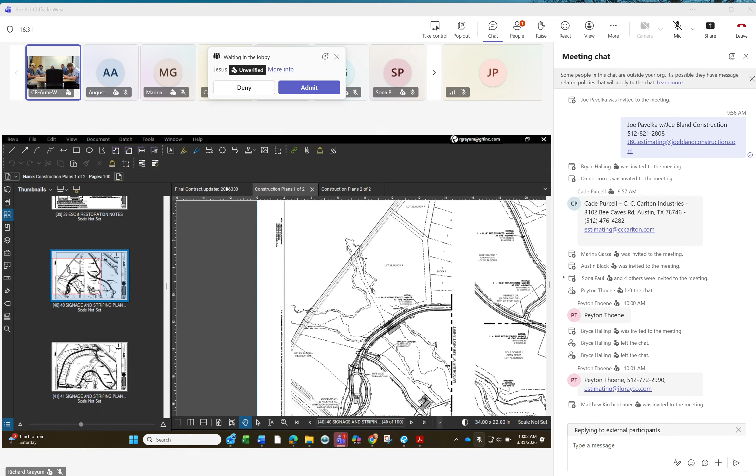Yes, we will vet everybody accordingly. Before this, I had never even worked with Waterline. Who has worked for in the past? Most of my experience has been with Geotech, Liberty. I thought I was missing one. Cash, I've worked some with Cash. Longer time ago, CC Carlton most recently. Some engineering, I haven't worked with engineering. A little bit with DNT a long time ago. Chasco, I worked with, so it's been a bit. Yes, a lot of this. I used to do with Randall Jones, and we dealt with a lot of different array of contractors. Yeah, so Cash, DNT, DC, Austin Engineering, Liberty Civil. Yeah, a little bit everybody. Everybody.

Okay, I think everybody's in the meeting now. A lot of people in the meeting, so we'll go ahead and get started. Why aren't I in that meeting?

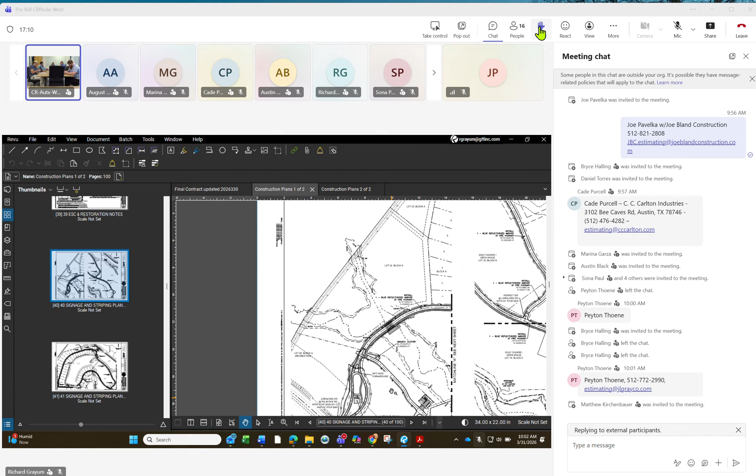30 days, here, okay. I was trying to share my screen here. Someone raised their hand, I don't know. Oh yeah, I'll go back. Oh, it's a store, yeah please. Can everybody hear me on the phone? Oh.

Yes, absolutely. This is a combination of the Cliffside West subdivision construction plans by GFT and the raw water transmission main by Langan Engineering, both happening in the same physical space. So we thought it'd be better to bring those two projects together and hopefully have one contractor do both projects. So that was the reasoning behind that. Sorry if we're scaring and shocking some of you guys, but that was the intent.

Matthew Hamilton is here with the owner's rep. Matthew, do you want to comment on it? I mean, I think Richard really kind of said what we're looking for.

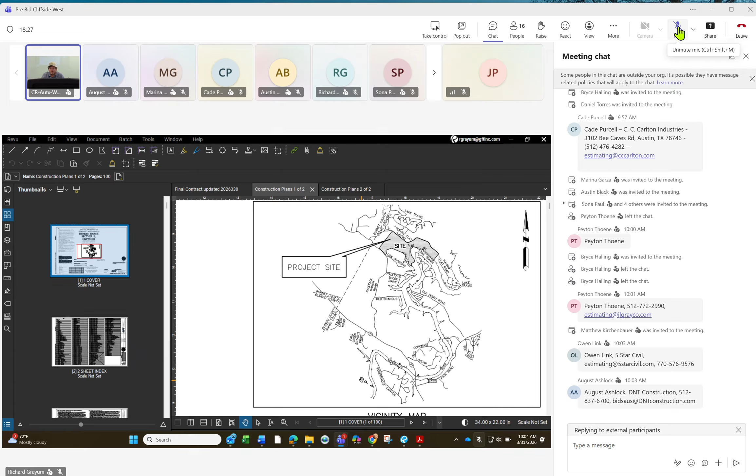I know this is a bit of a unique situation. I thank y'all for being flexible, but yeah, the idea is that we can build out the subdivision, which is Cliffside, at the same time as segment 0 of our raw water line. They're very close to each other, and we're hoping to get some economy of scale by having these two projects together.

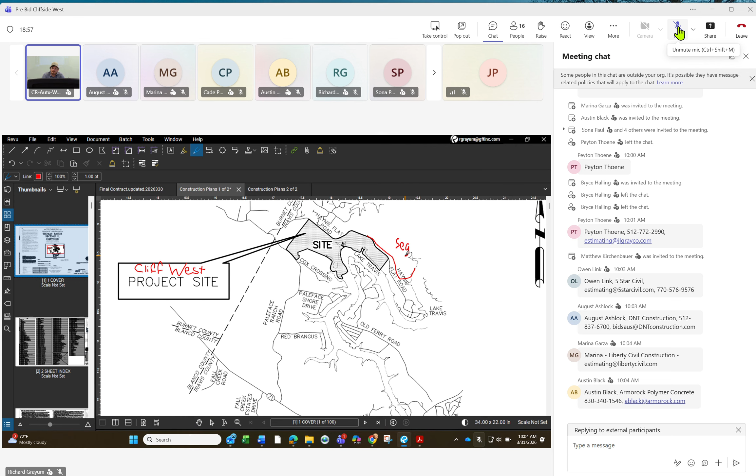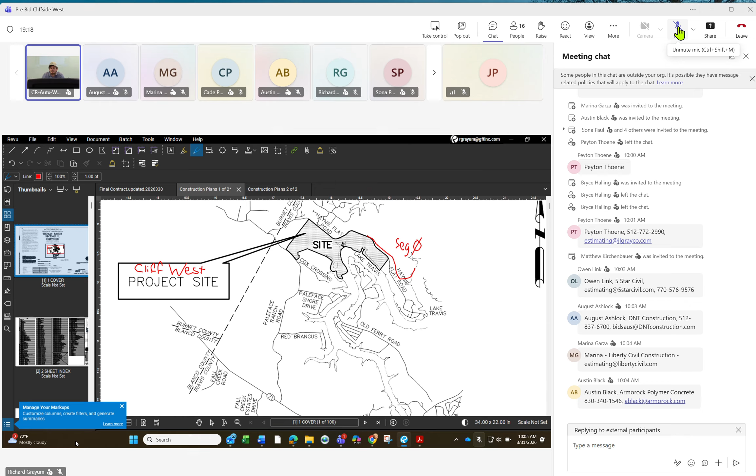So you'll notice as we send out the bid packages that each project is an alternate to the other. We'll be looking at both bids separately, but in a way, we should be getting the same numbers or close to it from both separate engineers' bids, if that makes sense. I can appreciate this is a really unique and potentially confusing situation, so feel free to give me a call to kind of clear any of that up if we need to.

Let me just kind of introduce myself. My name is Richard Grayum, I'm with GFT. Marco Lopez is also with GFT. These two gentlemen are with Langan. You guys want to introduce yourselves? Israel Ramirez with Langan. And Genaro Garcia, project engineer with Langan.

Alex Arndt with Geotech, SWPPP. Riley Hilton with Liberty Civil Construction. Okay, and then we have a cast of thousands on the teams, so I'm just going to show their names there and everybody can see everybody. Does anybody have anything they want to start off with? Any questions before we get too deep into my spiel?

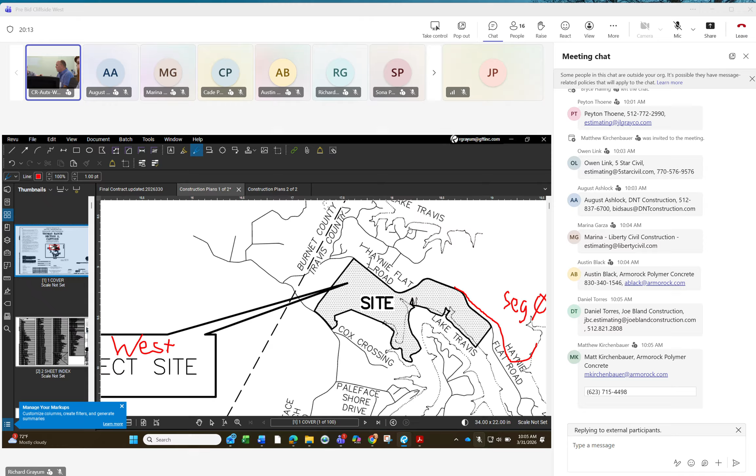I appreciate that. Okay, well, this is the shared pre-construction conference, pre-bid conference for the Cliffside West subdivision plans, and an alternate to include dry utilities for that plan, and an alternate to include the raw water transmission line.

The raw water transmission line comes from Lake Travis and it goes up a private easement, and then it goes through the Haynie Flat Road right of way. Sorry, not the right of way, but an easement just outside the road right of way. But it does cross the road right of way. So we have two crossings of the road right of way, one with segment 0 and one with my project, the Cliffside West project.

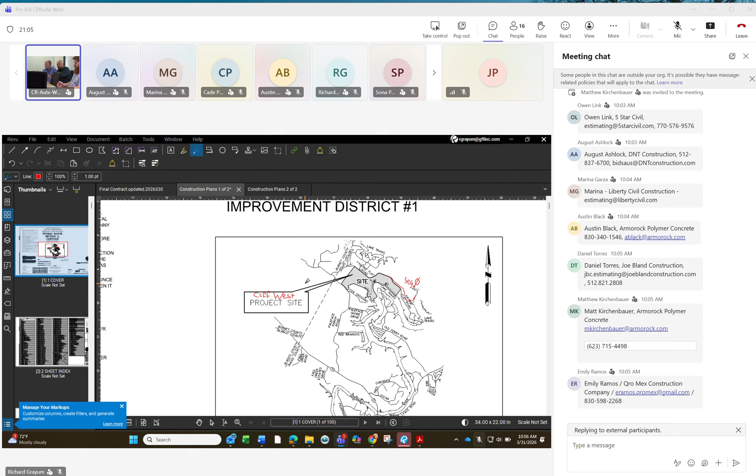In addition to our permits, you'll have to get the right of way permit to cross the street, I believe, across Haynie Flat Road. And Haynie Flat Road is an active road, 45 miles an hour, so please use extreme caution out there. But it is an active road. And they did just - I don't know if you can see my screen, but where this says segment 0, right now there's a construction project to do what's called segment 1, and it kind of continues that to here.

And then there was another project previously to do another water line that goes to here. So we're talking about now in this project doing the red segment. These other lines are already in the ground. In addition to those lines, there's a few site projects out there, the water plant, the wastewater plant, and a few active golf course site plans, in addition to the golf course grading plan.

The golf course grading plan is the Laura Loma golf course. It is a very new golf course, expensive turf, and we're going to have a lot of considerations about how to get you through the project without affecting the golf course. The golf course is active.

What did you say the days were? Every day but Tuesday and Wednesday? Yes. And so if there's any need to cross the golf course path, we're going to probably have to cordon off that portion of the work until we get a good window in summer to go through there. Or is that what you said, summer, June, July?

In July, the golf course will close, and so there could be a window there that we can get a lot of that work done without disturbing golf. And so when he says the golf course, the real big part of your project that's affected by that is just the road, Laura Loma Drive. Let me show you this road here.

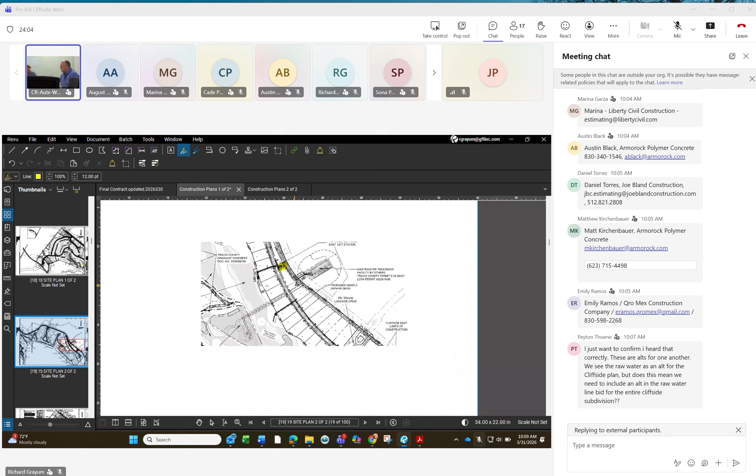And I assume that's where you probably want to dig your test holes. So I'll get somebody's number to coordinate a place for a real limited test hole. If you want to dig any other test holes, other places, just let us know where and what for, and we can consider it. But we're trying to get everybody away from the golf course as much as possible. I don't mind going down here or the other location off the road where that lift station's going, so I think that's where you're most interested and where the test hole is.

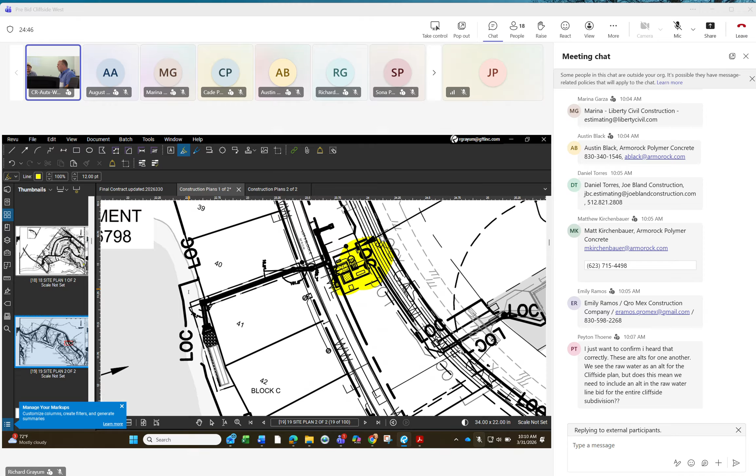And there's some of these level spreaders. I don't think this one's actually in the contract, but there's an example of one where it's real close to golf, but it's outside. It's inside the limits of construction, but golf is right there. So we're trying to keep you guys as tight as possible in there without going over, and the grass is real expensive to replace. But other than that, it's just standard.

I'd say that it's real tight on Hayne Flat with the water, the wastewater, the gas, and the electrical. So what we have out there is a 15-foot utility easement for the gas and electric, and another 15-foot for the water line, and another 15-foot for the wastewater. But the 15-foot water line has a 24-inch raw water line in there.

Proposed and existing, there's a very tight arrangement of how the water lines go together with the wastewater. The wastewater profile has to be 2 feet lower than the water line profile, even though they're all pressure lines. So there's a very specific arrangement within Hayne Flat.

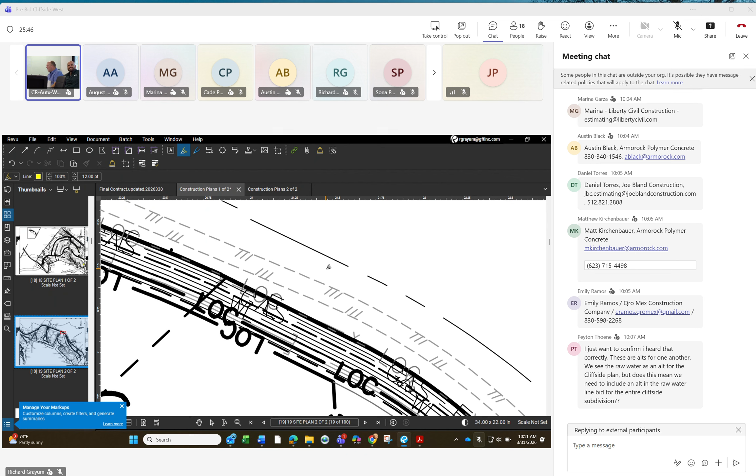Like I said, that first 15 feet already contains the electric, so they made it even tighter to work in. But there is a 20-foot easement on the south side away from Hayne Flat to work in.

So I think we do have the limits of construction to accomplish, putting in the raw water line first, because I think that's the big sucker. And then putting in the wastewater lines, because those are just 8-inch and 4-inch lines through there.

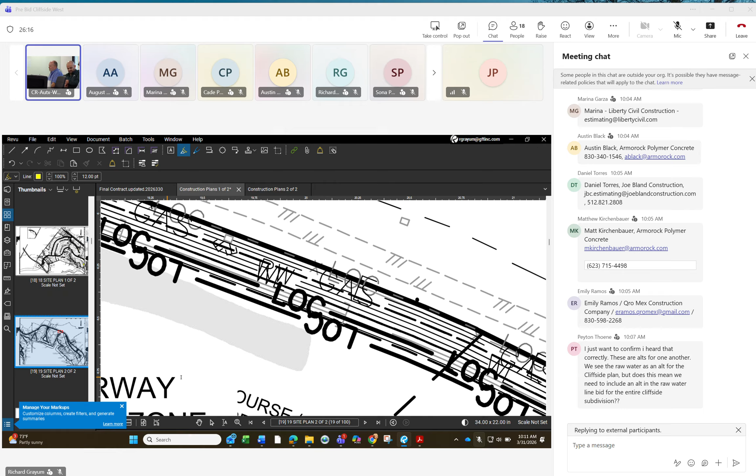I tried to upload the CAD, the Geotech for the streets, and also the Geotech for some of the site plans in the area, because I thought that would be interesting. There's a site plan down here, we had Geotech for what's called the golf house. So I included some of that into your plans, but there's the third lift station.

And I know your contract didn't have 3 lift stations in the bid form yesterday, but it does this morning. So your updated contract is in there, and I'm sure you're going to find some things that I forgot about.

So please put a Q&A, I'll open up the Q&A for you to tell me what I forgot. We will consider it, put it in there if appropriate. Want everybody to bid the same numbers. So if you see something, say something, because somebody's going to say something, I'm going to add it later. So let's just get everything in there and try to bid everything.

We have a tight deadline of April 15th, and we really want to honor that for the client, because they need to sell some of these lots. And in order to sell some of these lots, you can build these lines.

The lift stations are pretty standard lift stations, pretty much RCP kind of lift stations. If you have any questions about them, we can change things about them. We had considered y'all usually do the caisson method, but if that's not the case, we put some wings on them and save you some concrete. We're willing to work with you.

We designed everything, and we can undesign it and redesign it if it saves the client a lot of money. If it saves the client a little bit of money but costs us a lot of money, it's probably not worth it. So just be considerate of the designers.

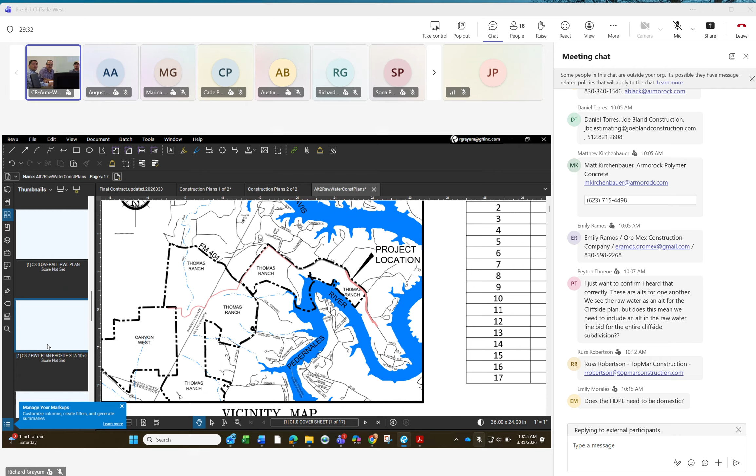We have fully approved plans, so we will be issuing notice to proceed as soon as we can, based on the bid opening. So right now, our bid says April 6th, but we will move it to fall in line with Richard's opening on the 15th. We will send out an addendum.

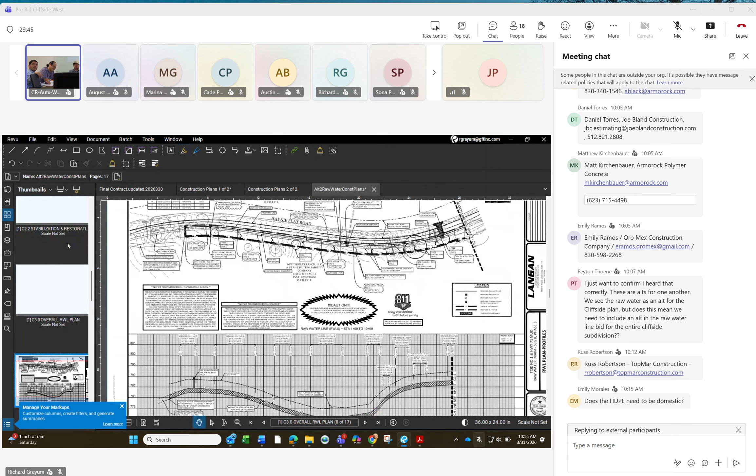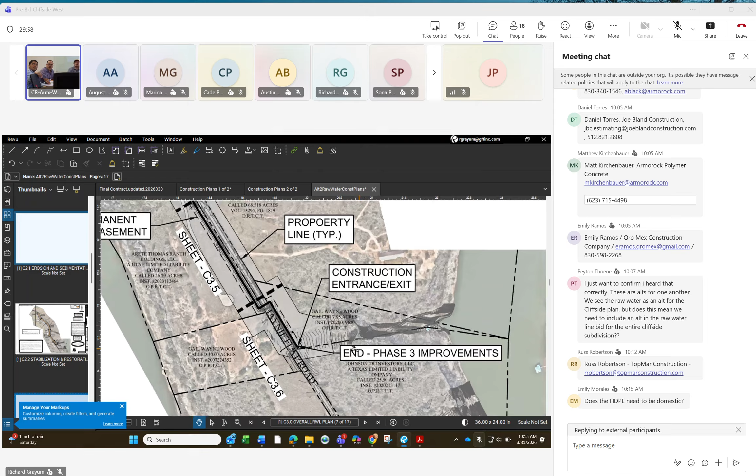Your typical inline furnishing of a 24-inch HDPE main. We need certified welders. We need good, quick production on that main, so Richard's subdivision can come in then after. The goal is to get the same contractor to do both. As mentioned by Matthew, there's a lot of work out here in Spicewood, and we want y'all to bid appropriately for it.

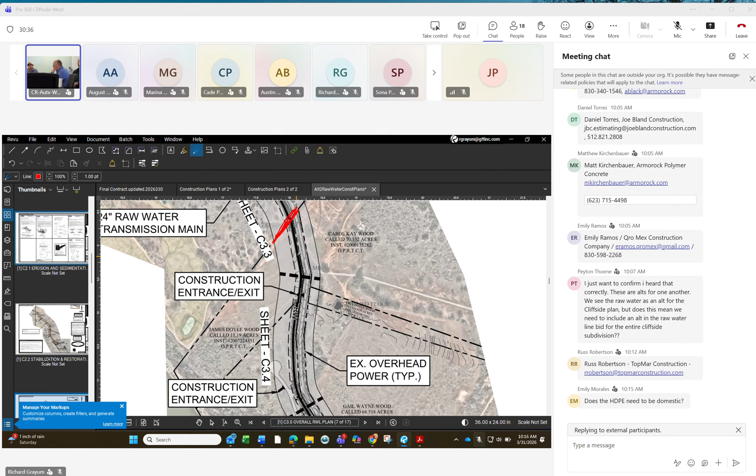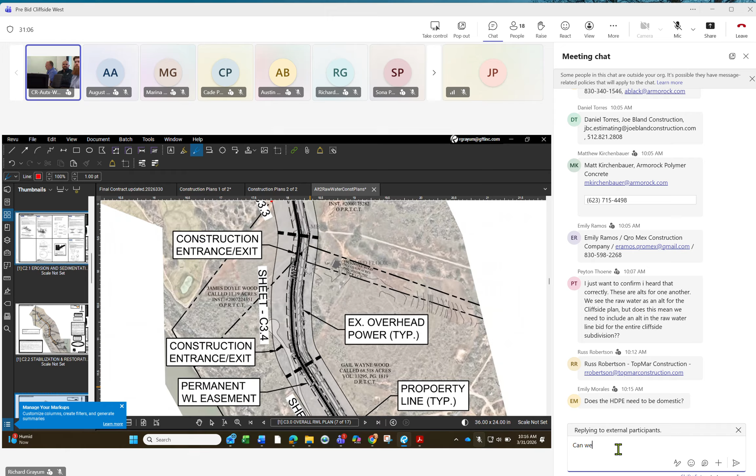You can see the location of my project kind of ends right there and goes for a ways up the street, and their project continues through some easements through here, some of them 15-foot easements. It's very precise line work, and we have the line work in CAD to show exactly where to put it. We're banking on the contractors to get everything exactly in that 15-foot easement, and that's kind of what I think they need to know.

It'll be inspected by Travis County, LCRA. TCEQ is not a part of this segment. And the district engineer may be out there for Jones Heroy. That's right, Jones Heroy will be out there.

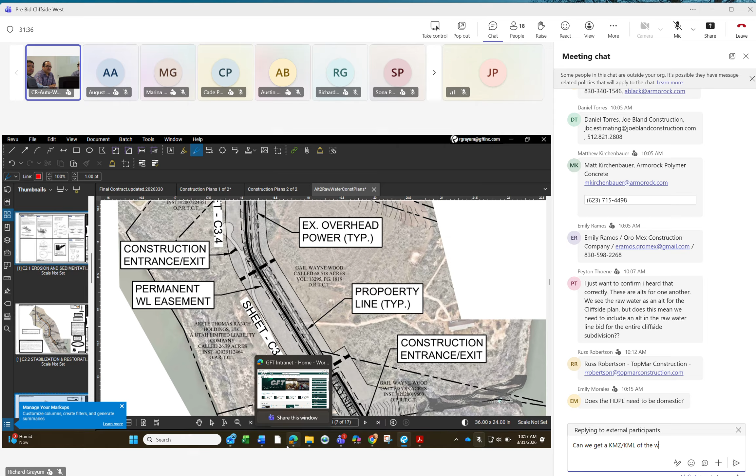Our project is open up for questions. We started answering questions, please feel free to ask whatever's appropriate. I think someone in the chat asked if the HDPE needed to be domestic. Is there any preference in that? We can find out.

We'd like the products to be on the City of Austin standard products list, and if not, provide reasoning why you think it should be on there so we can consider it for use. And if you have a different pump for the lift station, same thing, just provide what you think it should be, and if you can, provide the calcs or at least the pump curve, and we can do the calcs. We're happy to look at anything you have that's different. It just needs to be something that's going to last long and not have to be replaced.

Obviously there's some 1295 requirements in the contract that everybody will have to acknowledge too. I don't think there's any kind of funny no Israel products or anything at this point, but just look through that contract document, it is the standard ABHR contract. If you have any questions or substitutions, I think we put something in our contract for a way to substitute items in there.

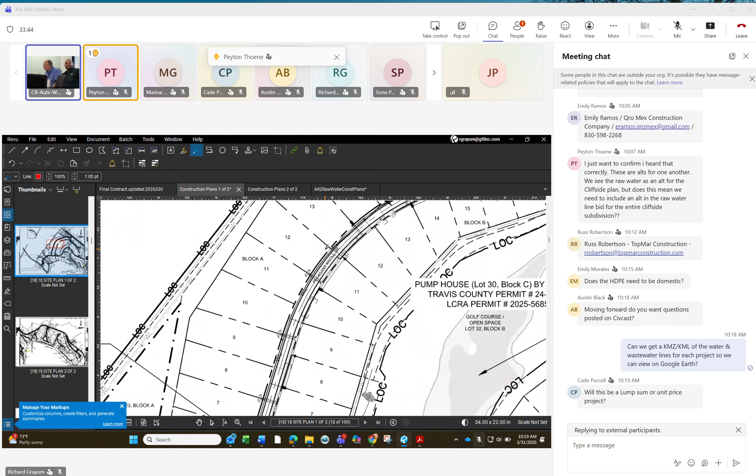Marco, what do you think? I think you already said everything about the project, so yeah. Nothing funny, but I'll tell you there's a storm sewer system up on these hills that has a grate inlet on top, and there's kind of a falls area where we'd invite you to lose your big rock here.

We think you're going to have some big rock spoils, and what we're going to try to do is line them up over here in this back area. We're already building a berm here, so if you need to build the berm with some of those rocks, that's a great place to lose rocks. I think there's a berm up here as well.

What's happening is there's a big flow of water coming off of this area in big floods, and it's the golf driving range. So the sooner we can get those berms up, the sooner we can keep you guys working in dryness. But that would be my hint to kind of helping yourselves there.

Other than that, there's an active water plant going on right there with active construction, but it may be a good driveway for you to get into some of this back area. The maintenance facility is permitted but not under construction yet, and it is a site where we can probably bring you out through here to avoid the golf course stuff.

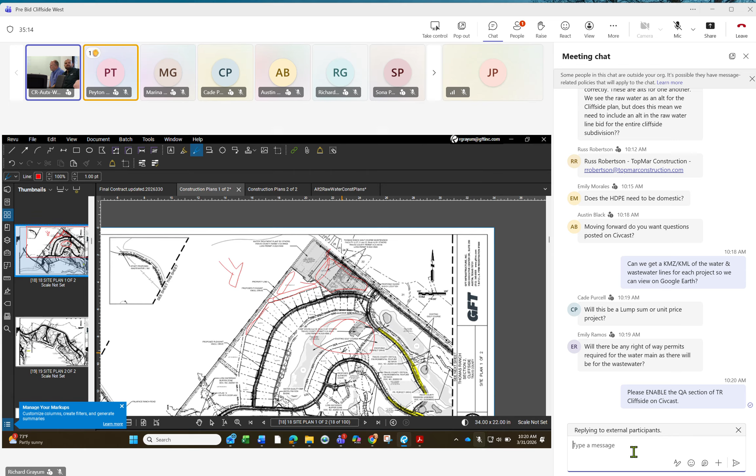The golf course operation right now is kind of happening right around here, and that's just, you'll see the tents out there, but I'll give you a contact name to coordinate with to go out there and look at stuff in the field and maybe a test pit or two, on the addendum and in the Q&A.

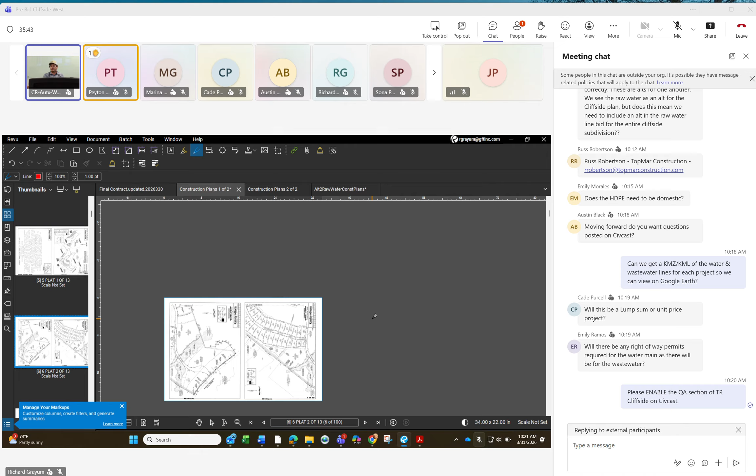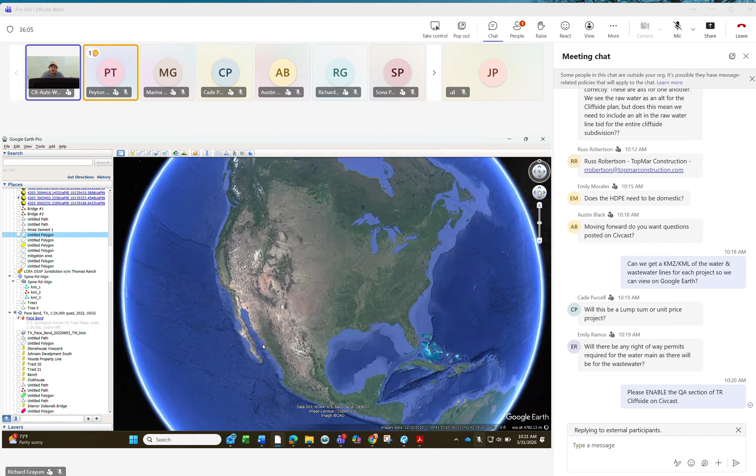We have a lot of work that needs to get done out on these couple thousand acres, and we're looking for every partner that we can have to make this possible as quickly as we can.

So Richard's showing these are the three tracts. If you do the two on the boundary, so it's one, two, and then you know where 48 is. Is it this one? That's the subdivision part, not that one. Yep, that right there. Those are the three that will be coming up here in the next few months, and then Spine Road is our main collector, and it runs from Paleface down to 71.

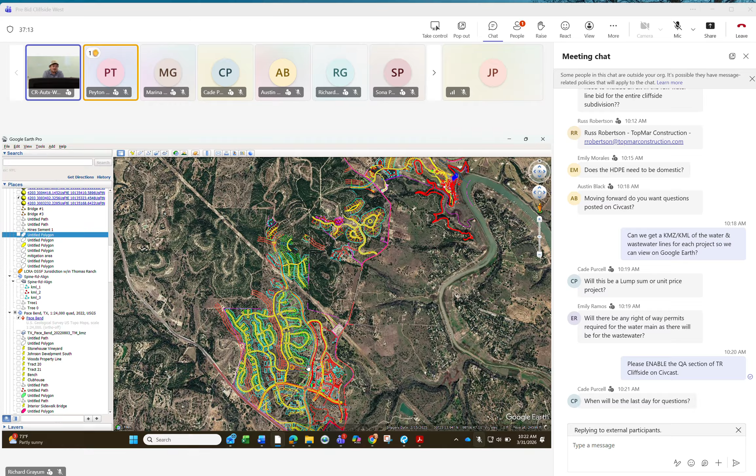There's water included in that as well. All of this will also have ancillary projects like groundwater storage tanks, wastewater treatment plants, lift stations, and all the supporting infrastructure. So a lot to be built as soon as we can, a lot to be bid out, and hoping that we can continue to have competitive bids with contractors that we like working with, and have y'all out there as much as we can.

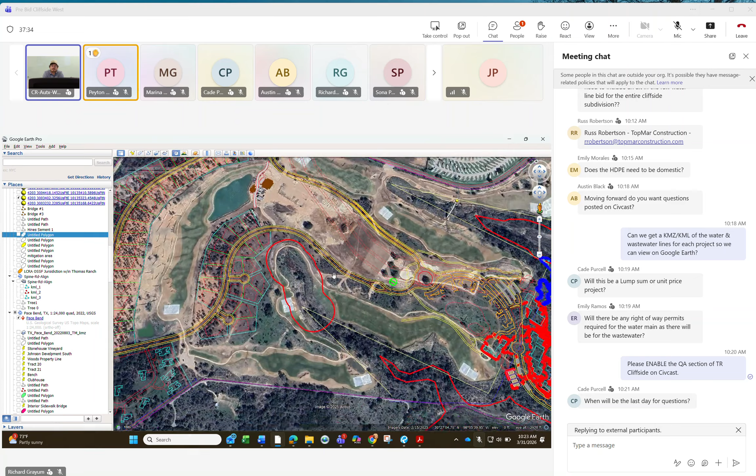So this is just kind of one of the ways to get into this, for the contractors that aren't already out there.

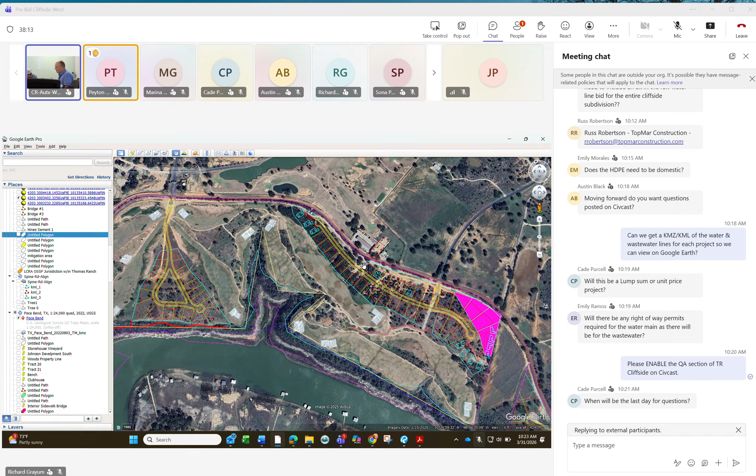This project does not include these two streets, but it does include the utilities within Hayne Flat and then the lift station to make it all tie together. So just FYI, these two things will be shown as not in your contract, but we are building the lines to the wastewater plant, to the wastewater lift station, and then across to the plant. Just one of the peculiarities of the project, and we'll release that one next, shortly thereafter. But we want to get this one on the ground, get going.

Also, at the end of segment 0, there's another portion of the project called the intake. That'll furnish a 24-inch main from Hayne Flat all the way to Lake Travis, and also an intake barge. That one will also be bid in the next six months as well.

Yep, nice, 10 million. That piece is right here and connects onto the end of this piece, segment 0. Correct. And then we have these easements through here, that should be in the plans.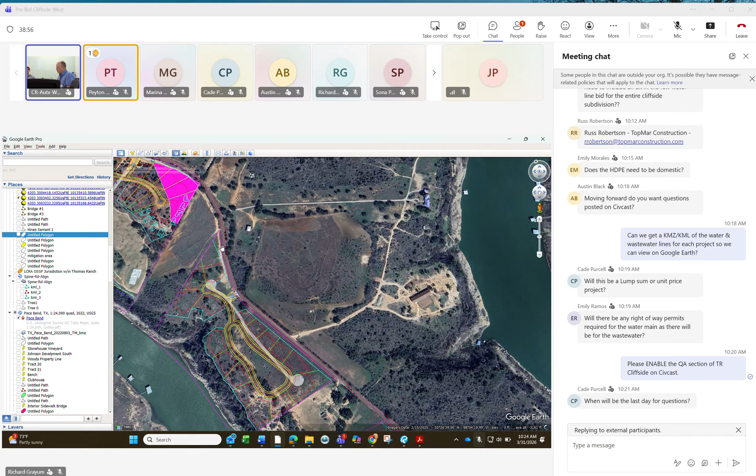And then, obviously, this is the other section that's under construction right now, and over there we've got two years of construction under our belt already.

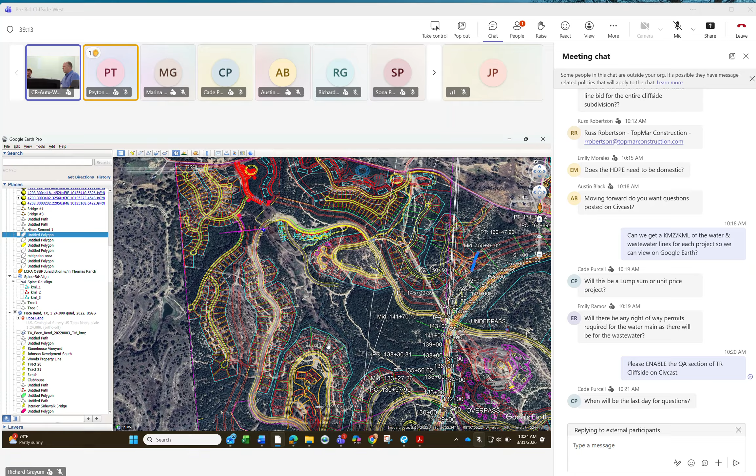I figured out, what questions do you guys have? There are a few that came through. Really tricky.